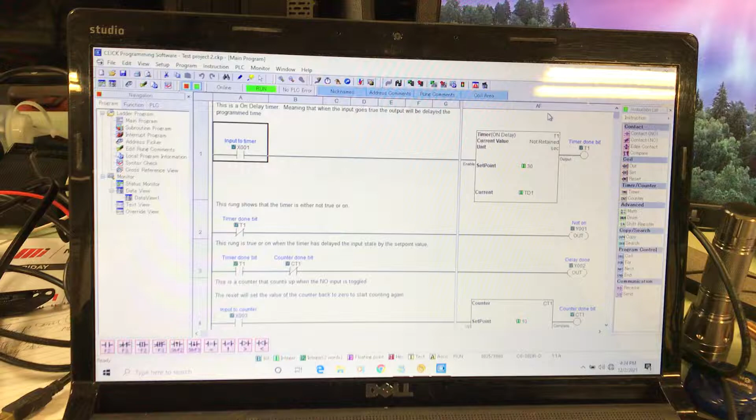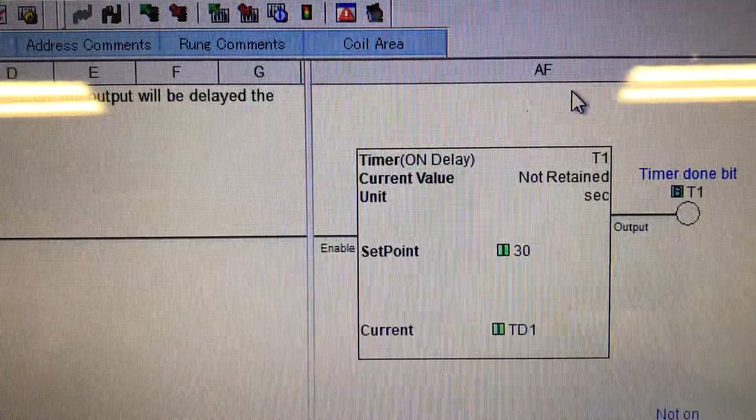This is the Click PLC program that is running, and as it says, this is an on delay timer, and notice input to the timer is X001. It's not on, and its set point is 30 seconds, and the current output is nothing. So there is no input, so there's no output. Once that timer's done, that timer done bit will turn on.

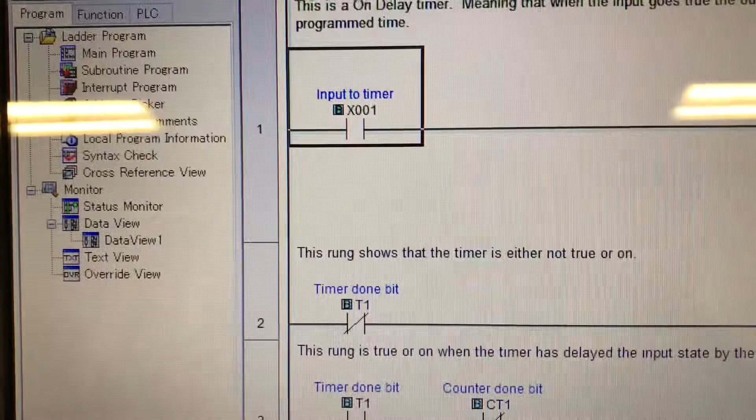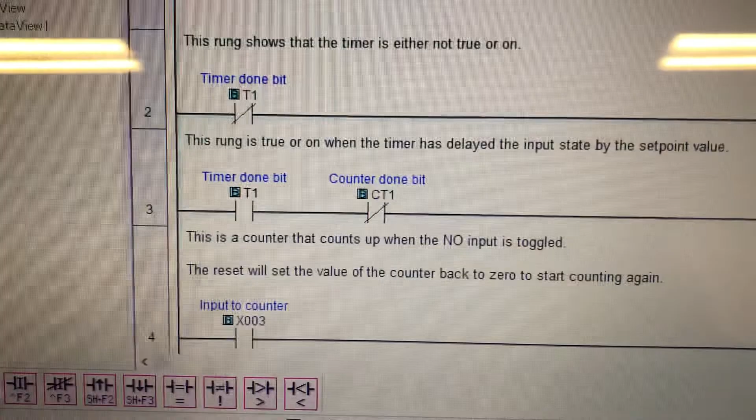The next rung looks at that timer done bit, and this rung shows that the timer is either true or not true. When it's true, it will say not on Y001, with Y being outputs and X's being inputs. So if the timer done bit is true, T1 will go to a 1. The counter not done is because we have a counter and it hasn't counted out, so that will set our delay time relay Y02.

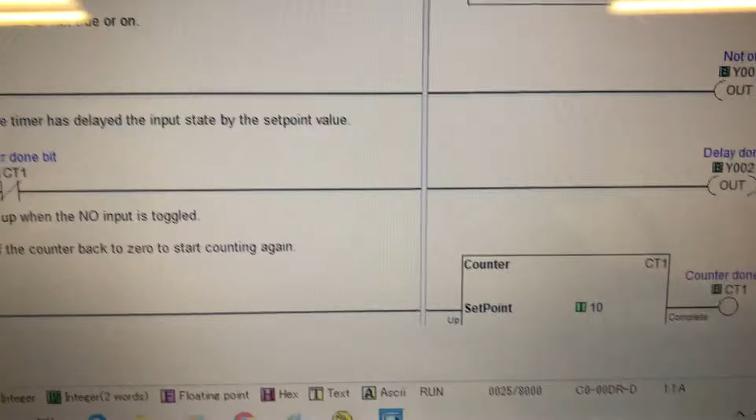And so our input then is the input to the counter, and our counter, so when X003 goes true, our counter will count a 1, and then once our counter is counted to the current times, which it's set to 10, it will turn that output CT1 on.

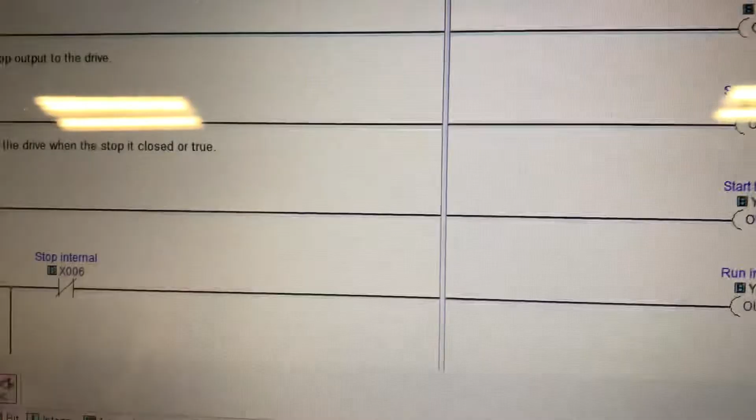And then we have our start switch, which is X004, which is the input that will tell the drive stop, and it has to have a stop to be able to run. Our timer done bit, when it goes true, will then send a start to Y004, which is, since it's two wire, just a set of contacts. When they close, the drive will go to a run.

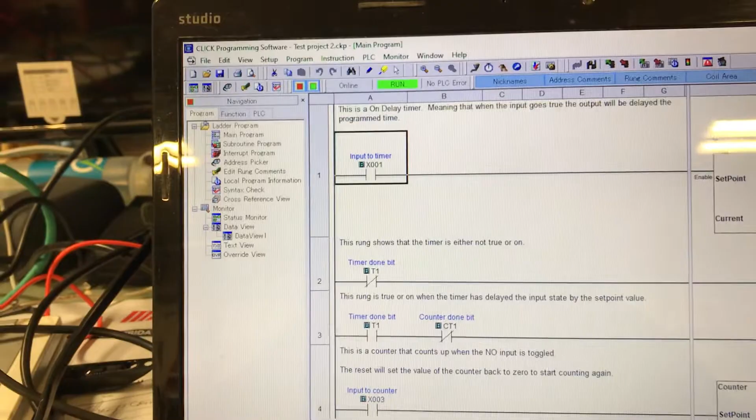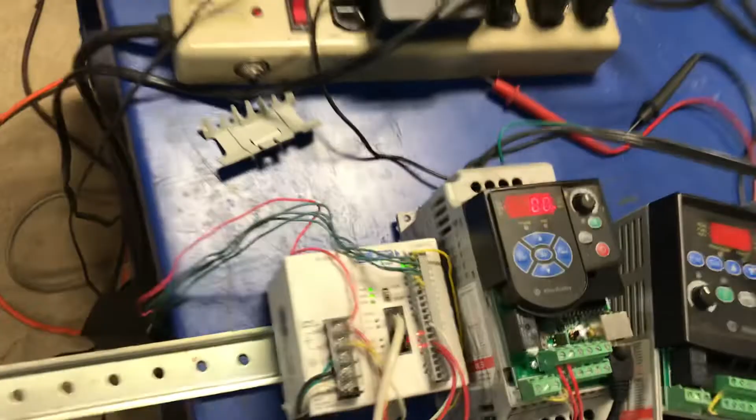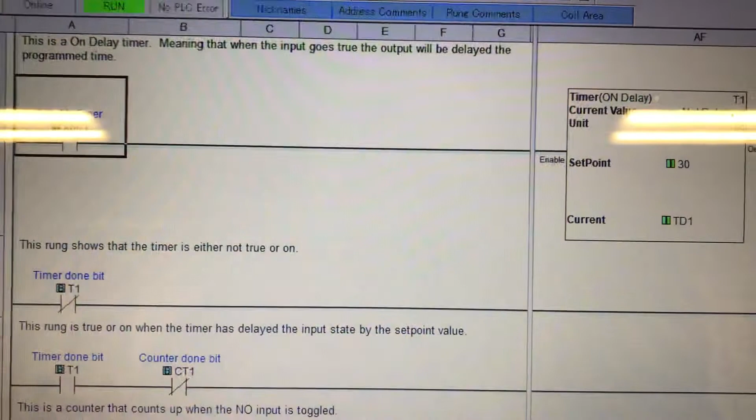So I will go back up to the timer to show you the timer starts timing, and we will turn the input on, and currently it was nothing. The drive's not running. We now go back to the computer program, and the input, notice the PLC is in run. At the end of 30 seconds, our timer done bit will go true,

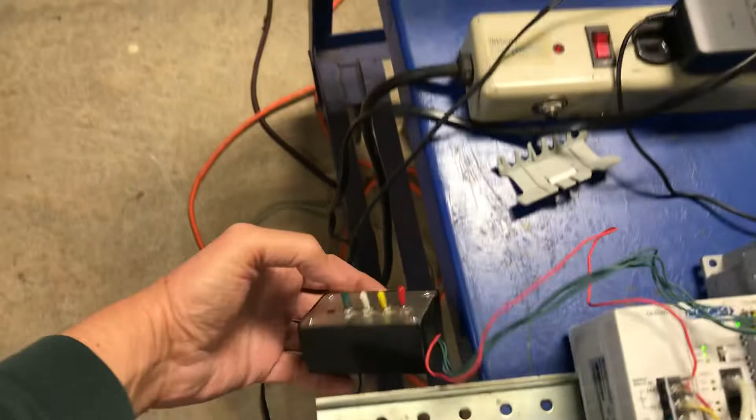and once our timer done bit is true, we will physically put a start on the drive, which, notice the output has got the drive running. If I turn that input off, it will immediately decel to 0. So that's the way a PLC controls the drive.

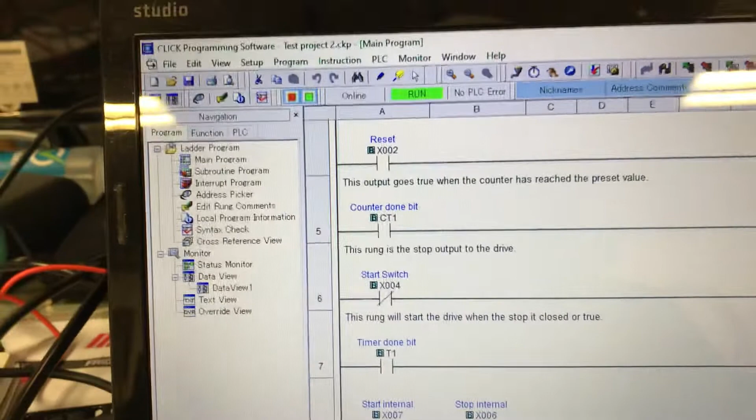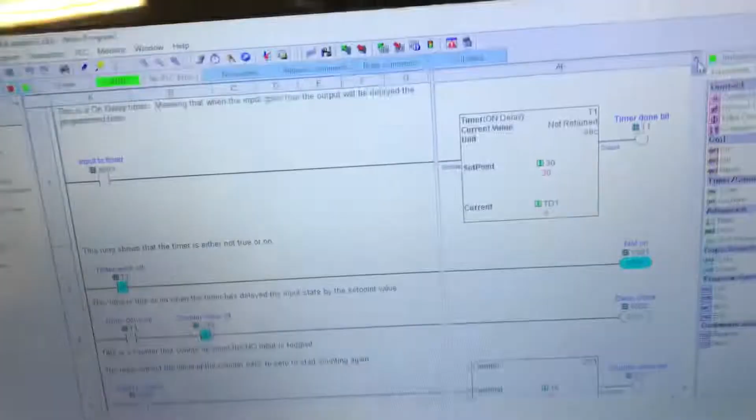Again, if I put it in monitor mode, status, you can see the inputs that are now true, and see the timer is continuing to count up, and it's true. I will turn it off, and you will see that the drive stops. So I turned it off. It's now stopping, taking 5 seconds, and see the output is no longer true.

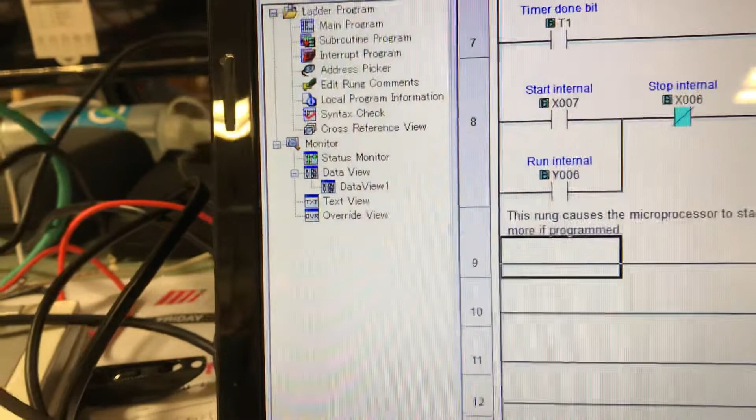The timer done bit is not done. And since it is a not, so the timer is not done, our start to the drive went away. I'll do that again so that you can see the input. Currently it's not true. So we will see how that works. The drive is not running.

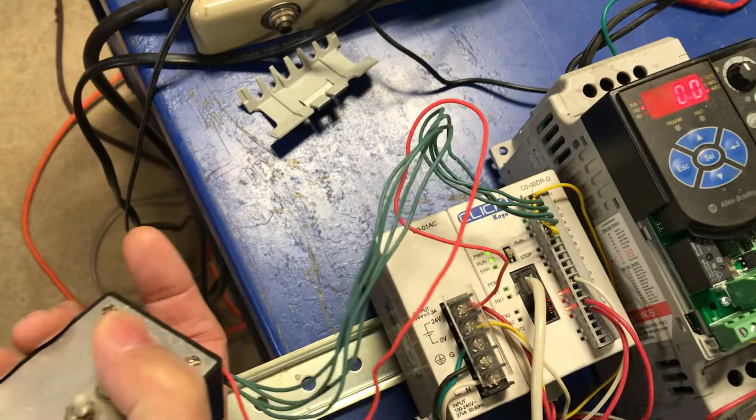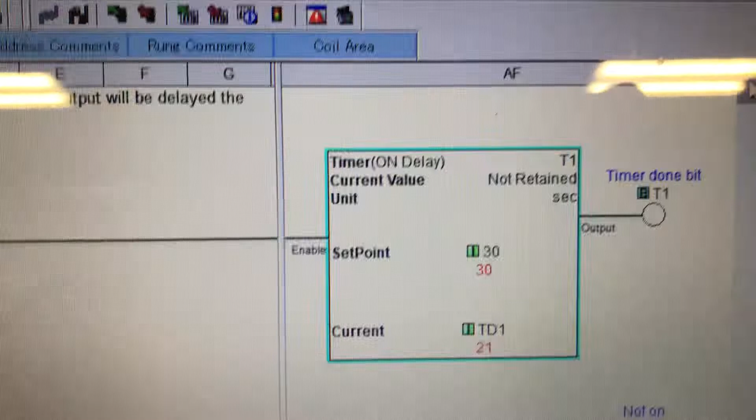I put power on the input. The drive is not running yet. Notice the input is now true. It's turned green. Our timer is counting. It's at 15 seconds. So it's counting the seconds. When it gets to 30, you will see the done bit go true.

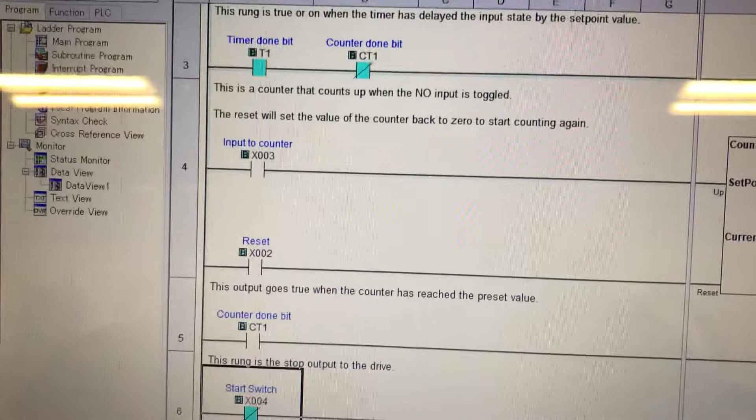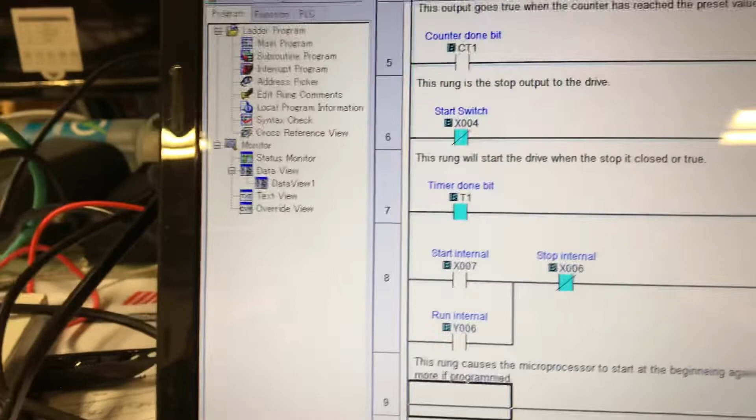That's how PLCs, notice it just now went to true. So if it's green, it means it's a 1 or true. There was our delay output. We're not using the counter currently. So on the drive, our output says we have to have a stop. So that meant the relay went true, which in turn told the drive to start, and it's now running.